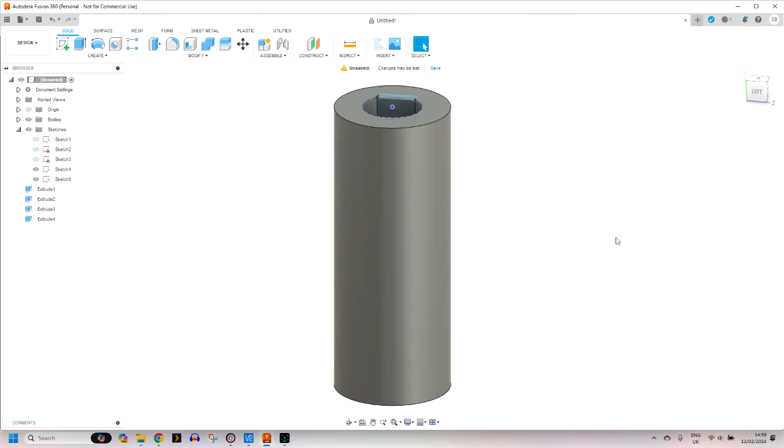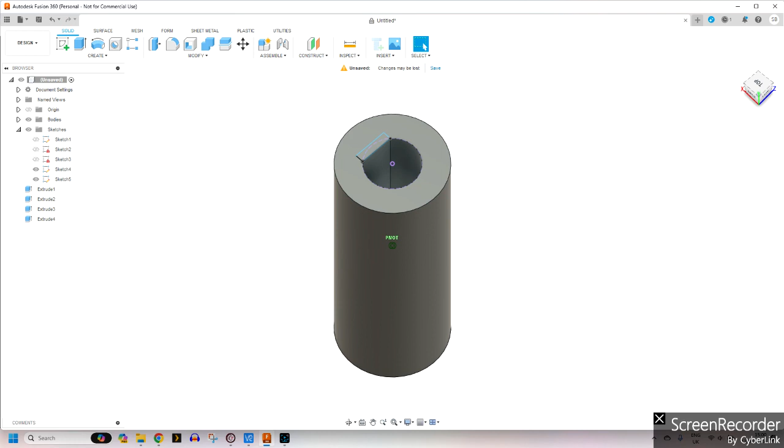So this is my adapter collar that I've been working on, which follows on from yesterday. I used one of the same features yesterday, where I showed you how you can extrude a part a particular distance. I drew a circle on the top of this and extruded it down by 15 millimeters, but I want to form a D shaft interface, if you like.

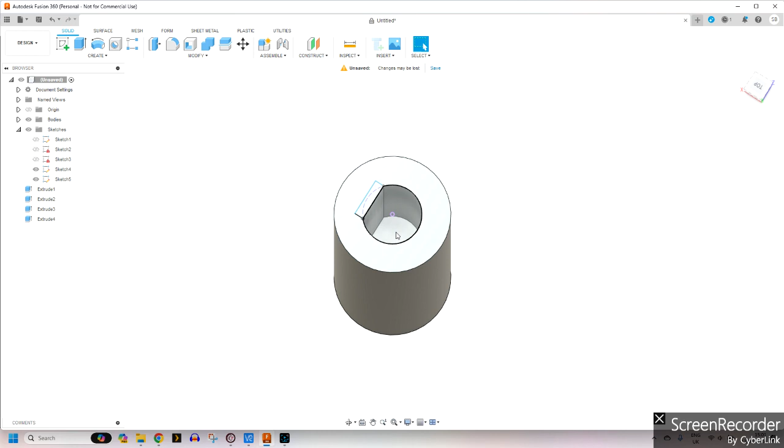So what I did is I drew a rectangle on my part, and instead of dragging it through the part using the extrude tool, I selected extrude and then selected the bottom of this hole as its distance to go to. That means if I ever change that particular distance, the D shaft will always remain keyed or locked to the bottom.

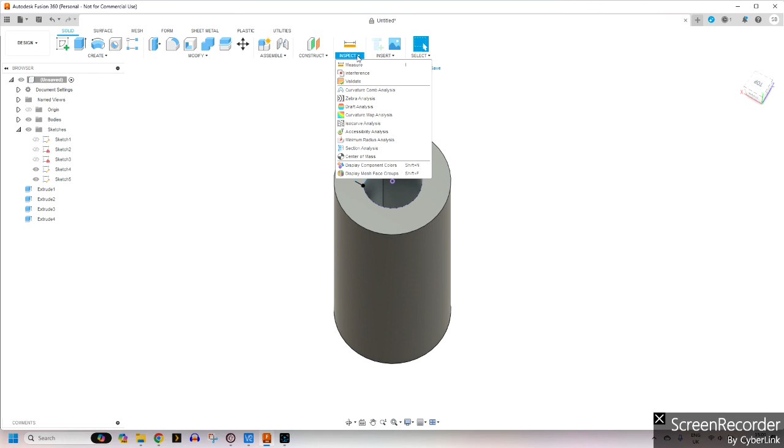Anyway, that's not really what I wanted to show you today. What I wanted to show you was a very powerful little tool which allows you to take a slice through your model, so you can check that you've got the parameters and clearances you were hoping for.

If you go to the Inspect tab up here and down to Section Analysis, that allows you to pick a particular plane. Don't forget these three yellowed out squares down here are your three different planes. So I'm going to just pick this one for the moment.

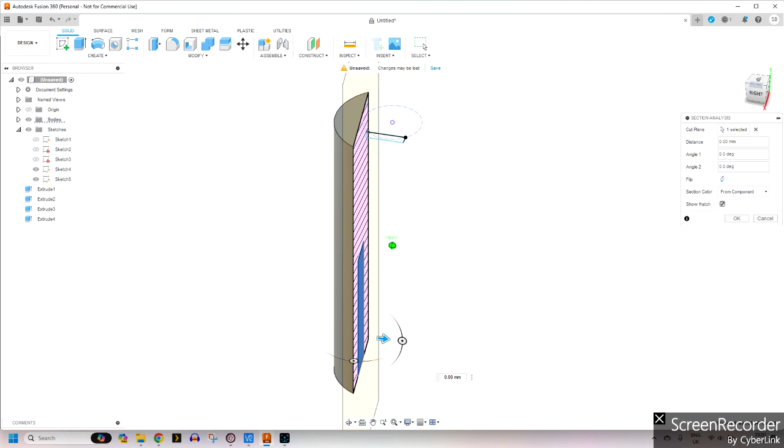As you can see, that's now put a slice through our part, and I can still move the part around, that's no problem at all. And if I now drag the blue arrow, you can see that's dragging this slice through my part.

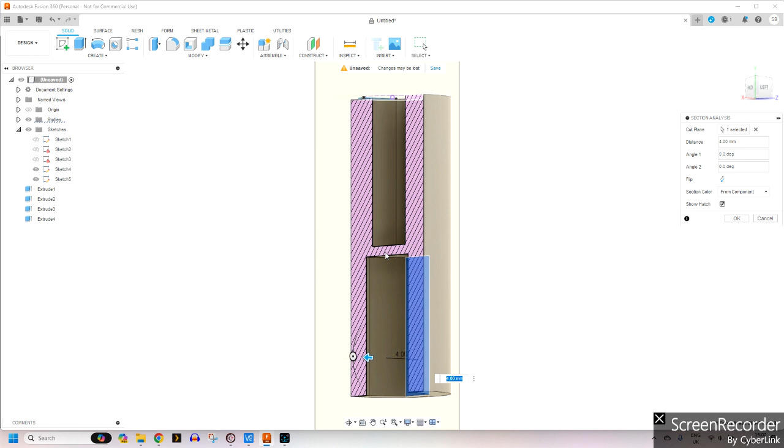So I can now see any particular piece of that part, and I can rotate it as much as I like. In this case, it allows me to see that yes, I have got some meat between the two different adapter halves, if you like. So I'll just cancel out of that.

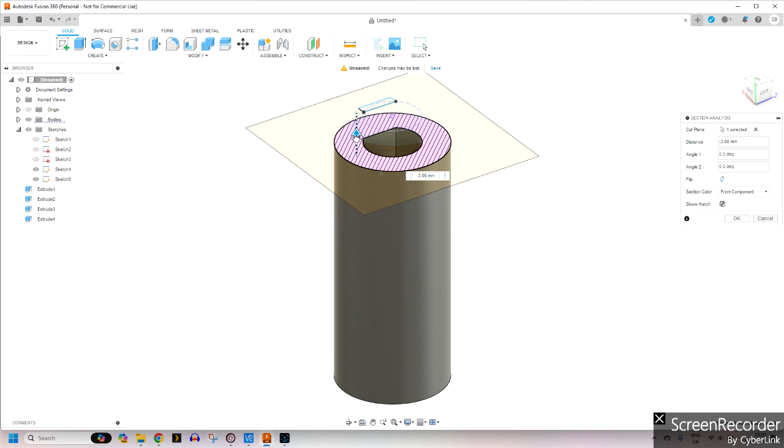As well as selecting one of those planes, you can also select a surface to do your analysis. So again, if I go to Inspect, Section Analysis, and click on the top, it now allows me to slice all the way down through my model like this.

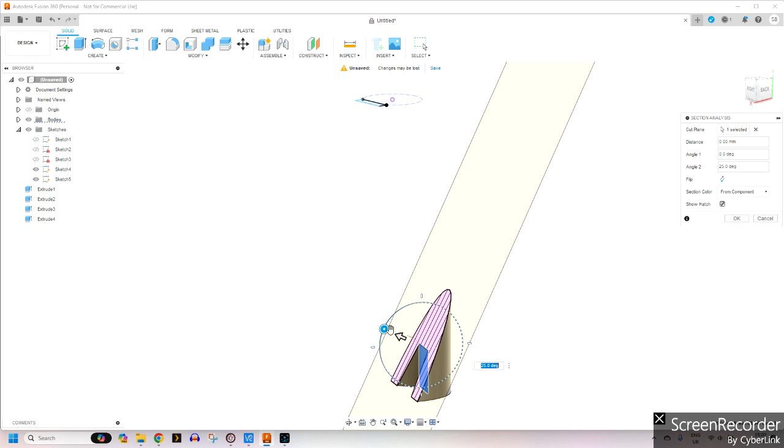Very handy little tool, very powerful little tool. You can even do fancier stuff with it. If I went and picked a plane, I can actually now rotate that plane as well. So if I spin this around, I can now drag diagonally through my part instead.

Very, very clever, very powerful little tool. Let me just chuck that back somewhere around there, and again, if I start pulling it through, you can see I've got my sideways analysis back.

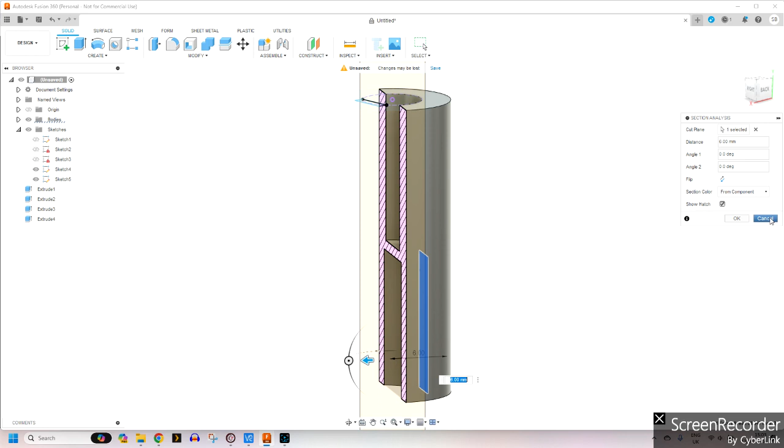This is just an analysis. It doesn't save, it doesn't split your model or anything like that, but it can be used as a handy guide. We'll talk about splitting a model in a different video, but just a quick one for today. I wanted you to have a little understanding that you can actually have a look inside your part without having to cut it up into pieces.